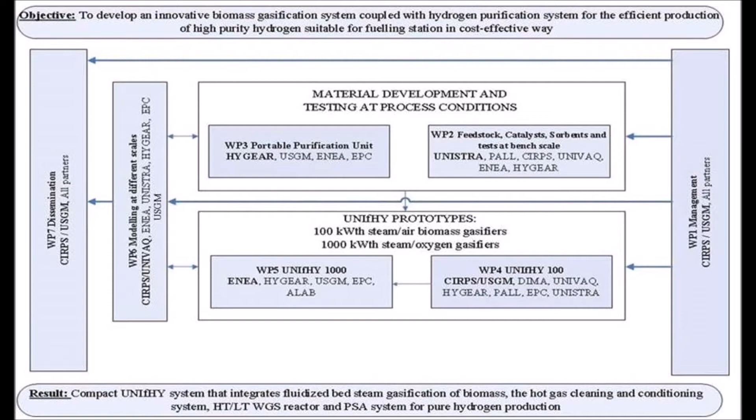UNIFHY develops a continuous, cost-competitive and sustainable process to produce pure hydrogen from biomass. UNIFHY integrates biomass gasification with catalytic hot gas cleaning, high and low temperature water gas shift performed within catalysts, and pressure swing adsorption for hydrogen separation,

and high thermal integration and efficiency by means of utilization of hydrogen-depleted syngas within the conversion process. During the entire project's lifetime, an effective and efficient management of the consortium was ensured by the former project coordinator, CIRPS Sapienza, and the replacing coordinator, Marconi University, to ensure adequate administrative support, monitoring the progress of activities and negotiating critical steps with all partners and FCH officers.

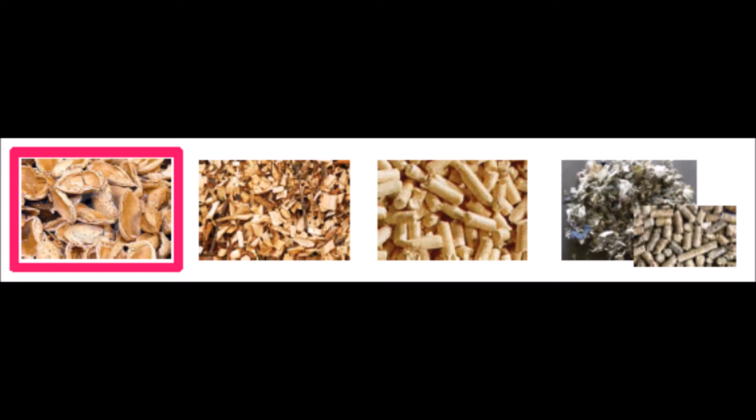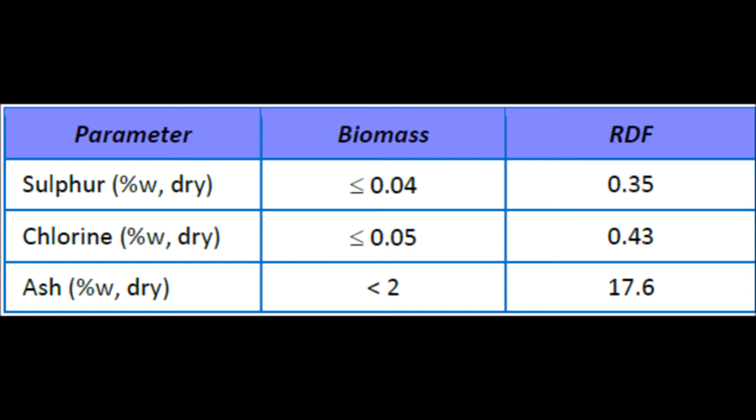A variety of biomass feedstocks have been characterized with respect to ultimate and proximate analysis, heating value and inorganic elements. On the basis of bulk density and cost of supply, almond shells appeared to be the most suitable biomass. In fact, it has an adequate bulk density, is relatively cheap, and has a content of sulfur and chlorine representative for many biomass feedstocks.

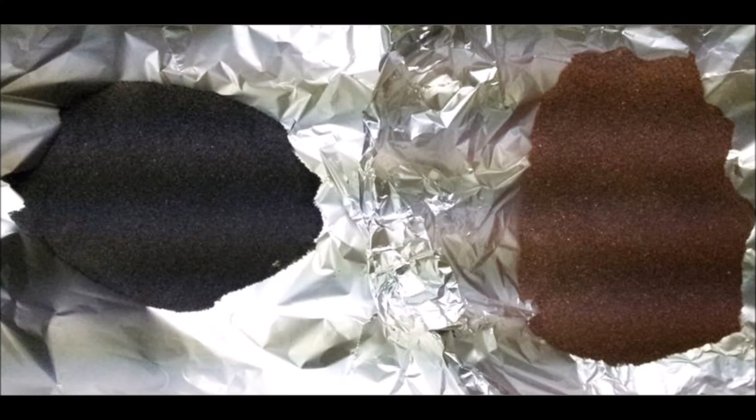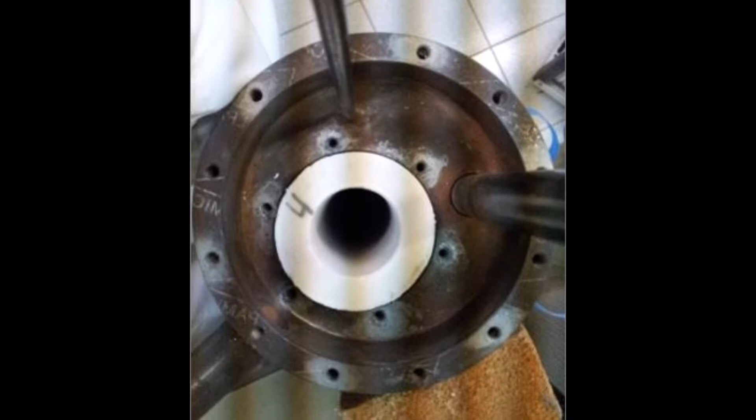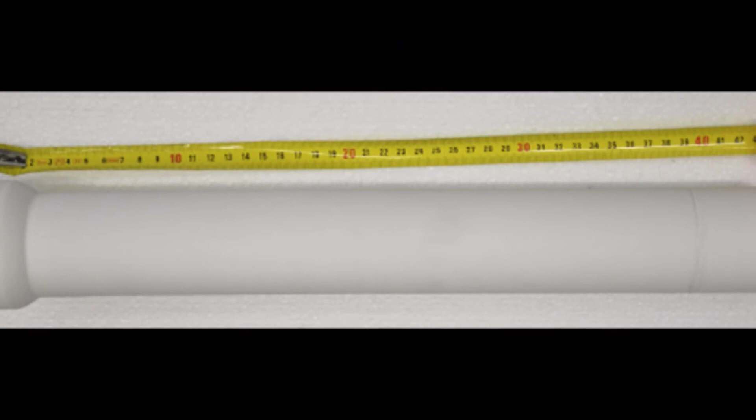Experimental gasification rigs with different capacity were used to test catalysts, sorbents, and filtration candles, so that standard characterization data such as sorption capacity and catalyst reactivity were compared with the behavior at real process conditions. The test campaign included 17 tests performed using 3 different types of filters hosted in the freeboard of the reactor vessel. The performance of a variety of catalytic filter candles when employed in a steam biomass gasification reactor freeboard has been assessed. The experimental campaign has clearly shown that the most interesting results are related to the use of catalytic filter integrated with catalytic foam.

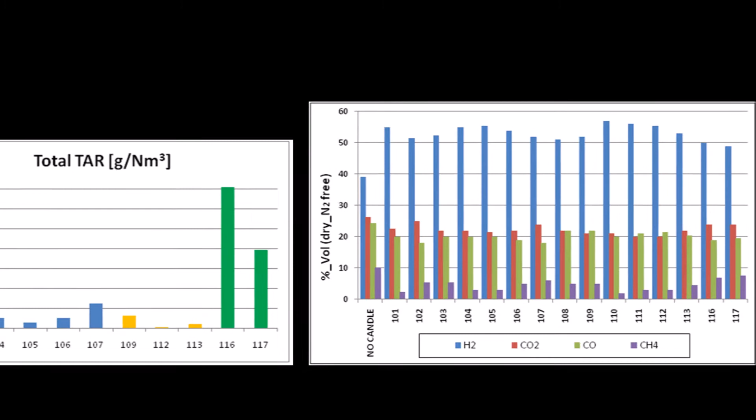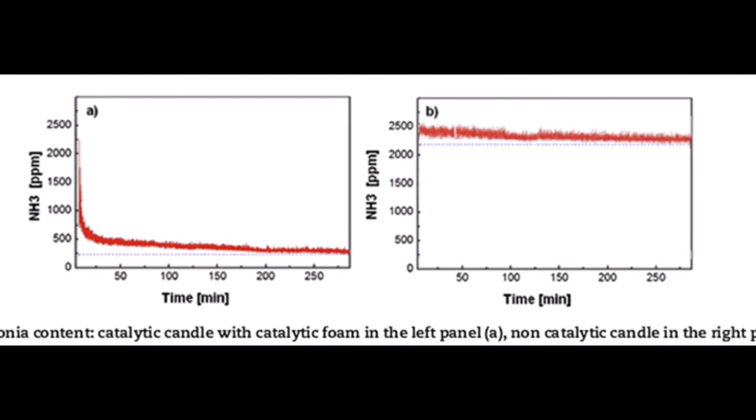In relation to other filters, higher percentage of hydrogen, smaller percentage of methane, higher water conversion, smaller content of ammonia and tar have been observed in syngas. On the other hand, the test stressed out the influence on the gasification process of the age of the olivine bed.

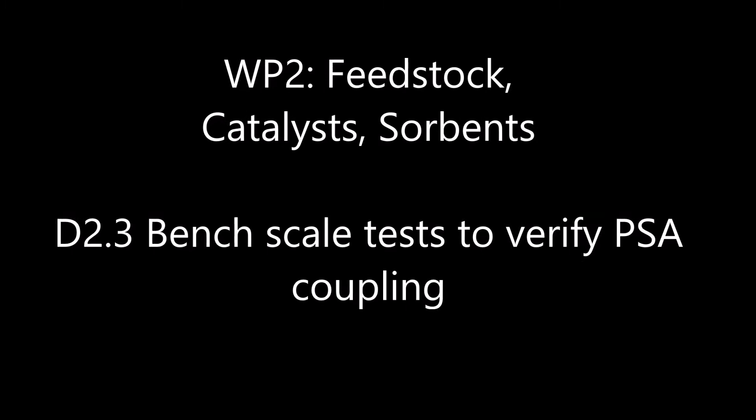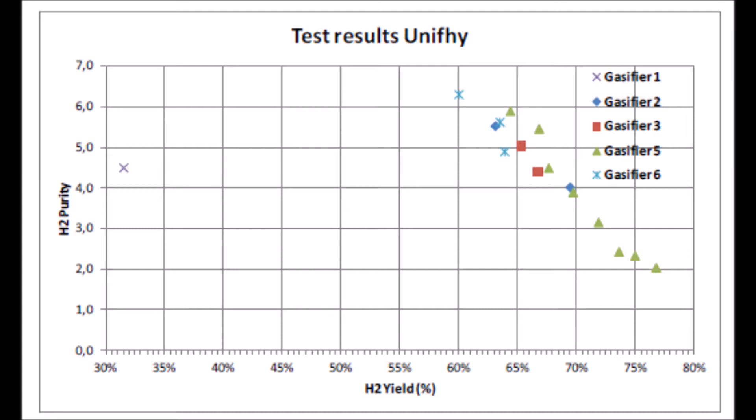Different wet gas compositions have been conditioned and upgraded to yield fuel cell grade hydrogen. Verification tests regarding the upgrading efficiency in terms of yield at a specified purity and the validation of HyGear's in-house PSA model has been assessed. Moreover, the PSA model was validated and agreed with the experiments and was used to define the design parameters for the PPS.

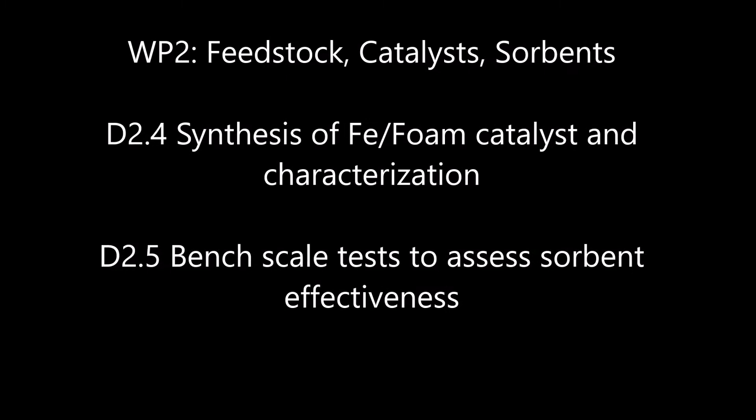An innovative catalytic system has been specifically developed for the water gas shift reaction to prevent pressure drop along the process and to increase the efficiency of the gas-solid contact. All catalysts were supported on ceramic foams.

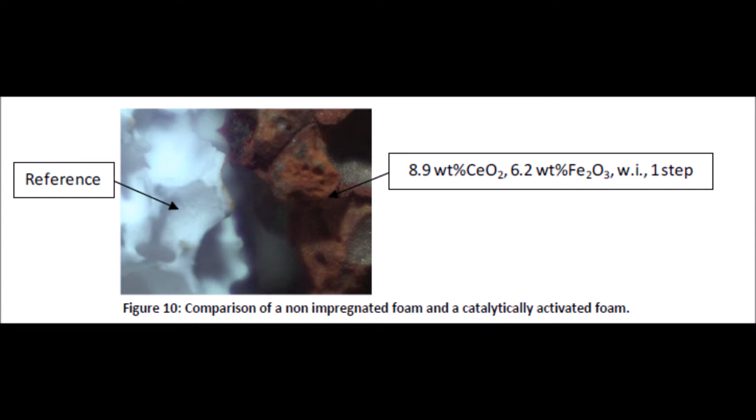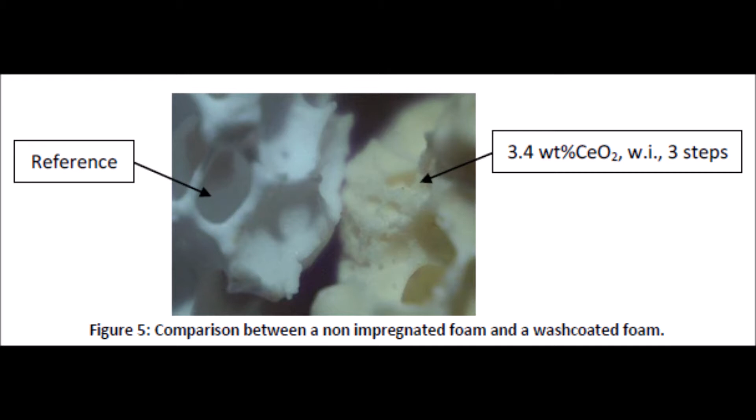The alumina foams with different porosities have been chosen to support materials for catalytic applications. About 150 ceramic alumina foams have been impregnated with cerium oxides to increase their specific surface area, and with iron and copper catalysts to test the water gas shift performance.

Reactivity tests have been assessed. Best results were observed with H2O per CO ratio of 2, temperature of 450 to 550 degrees centigrade, residence time of 1 to 1.5, to allow the water gas shift reaction, remove possible coke, and avoid reduction of the catalyst.

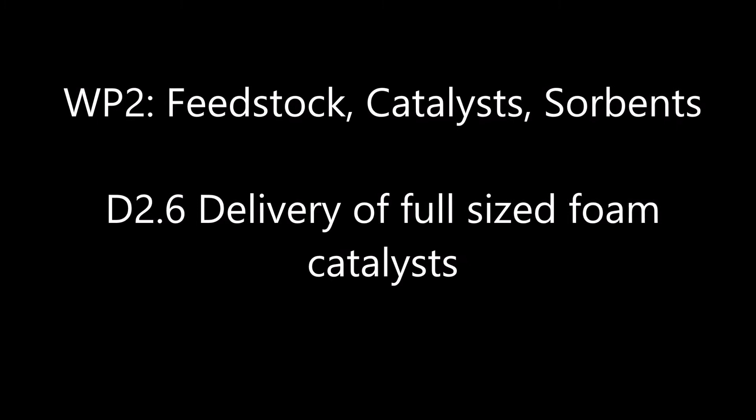Strasbourg University has developed specific innovative catalytic systems for high and low temperature water gas shift reaction. These catalysts consist of iron or copper supported on ceramic foams, to be used at 450 or 250 degrees centigrade respectively after the gasification reactor, to increase hydrogen production.

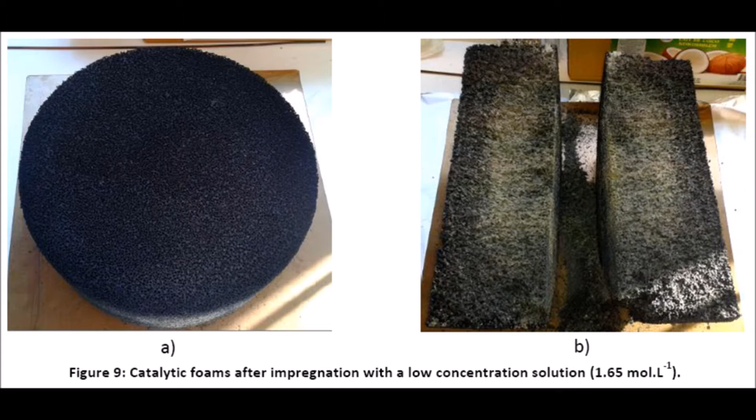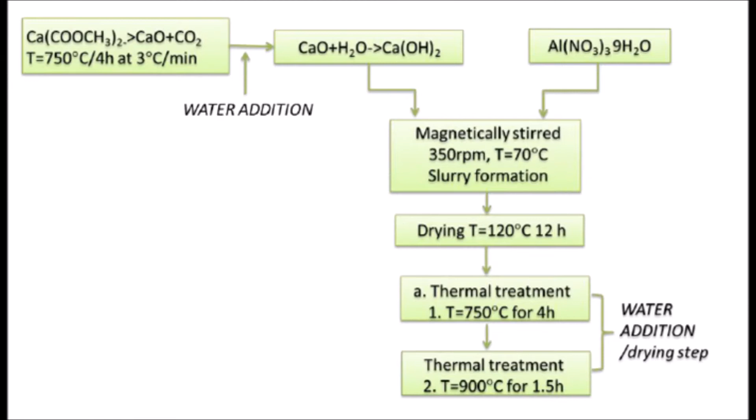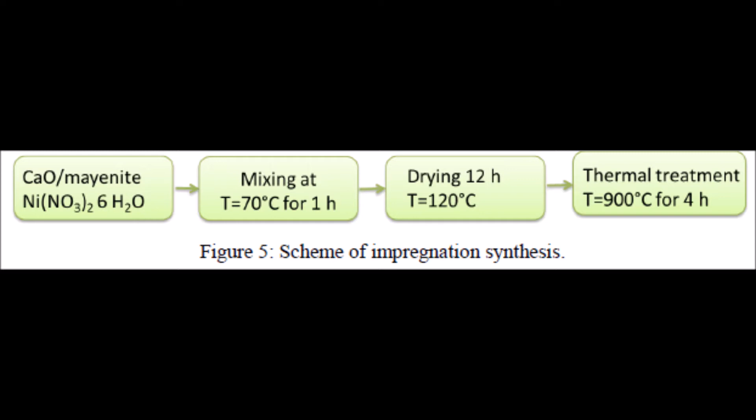This deliverable aimed to study calcium-based CO2 sorbents and bifunctional materials using different synthesis methods: hydrothermal, co-precipitation, and wet mixing. The most important features of the materials, like their structure, morphology, and textural properties, were analyzed by different characterization methods by means of specific surface area and pore distribution volume, microscopy, and X-ray diffraction analysis.

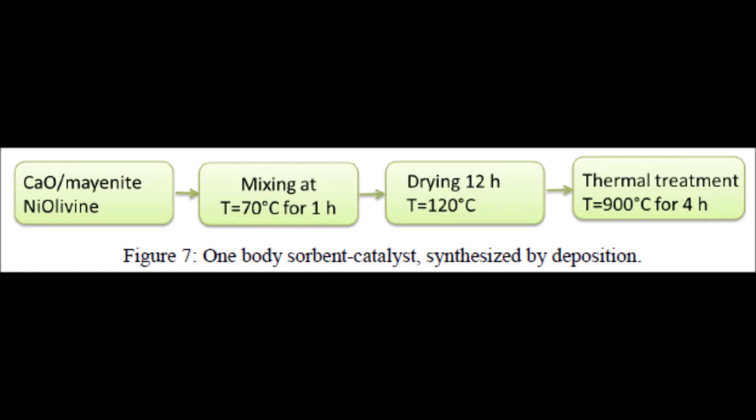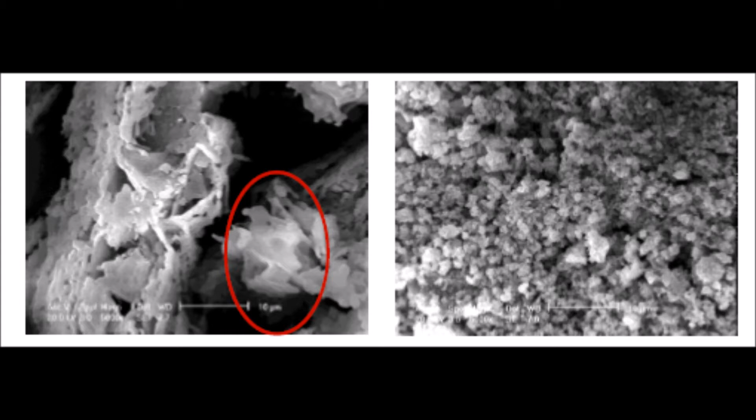In particular, mayenite, a ceramic stabilizing support for high-temperature sorbents, is not only an efficient binder, but also showed catalytic properties in hydrocarbon reforming and cracking. CO2 sorption tests have been assessed on the material realized in the previous phase in order to identify the sorbent with the best CO2 capture performance.

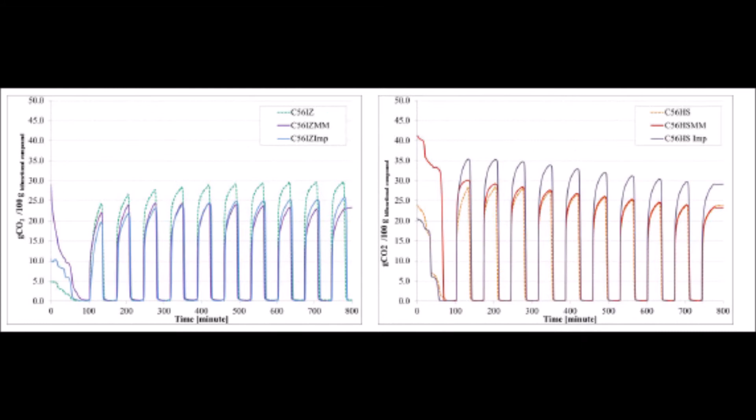Also, tar steam reforming was treated. Solid bifunctional sorbent catalysts were developed to perform catalytic steam reforming of tar at the outlet of the gasifier and simultaneously remove CO2, increasing hydrogen production.

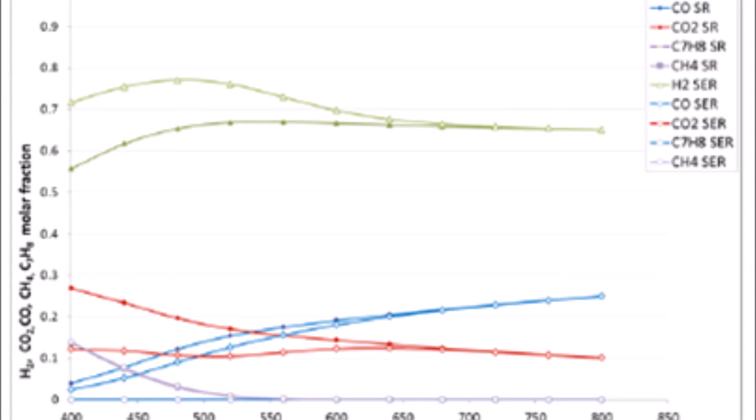The third work package focused on the design and development of the PSA and water gas shift unit. It also provided the engineering and construction of the portable purification system, which includes PSA, water gas shift, and complementary components.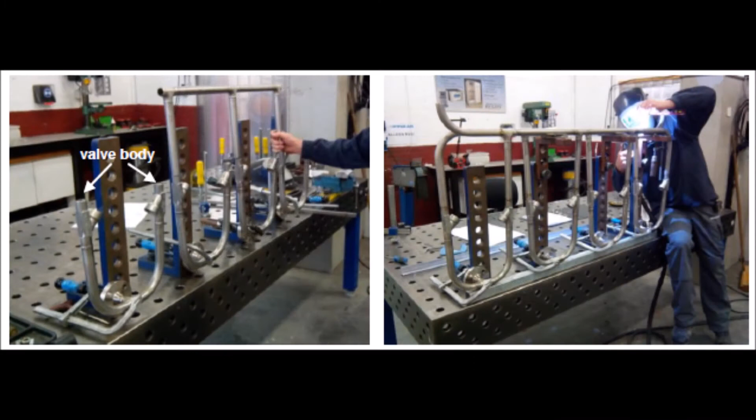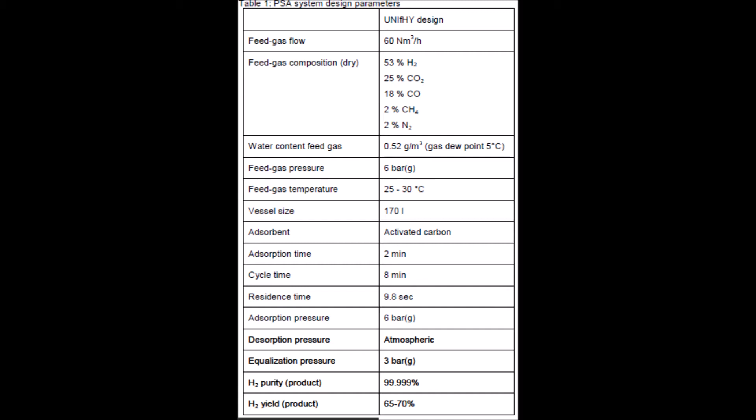Based on results reported in deliverable 2.3, HyGear's in-house PSA model was validated and found to agree with the experiments. The next step in development of the PSA was to use the model to define the system design parameters for the PPS unit.

This deliverable relates to the design and construction of the LT water gas shift reactor implementing catalytic copper-coated ceramic foams. Reactor dimensions were defined based on lab-scale testing performed by Strasbourg University and pressure drop evaluation performed by Pall.

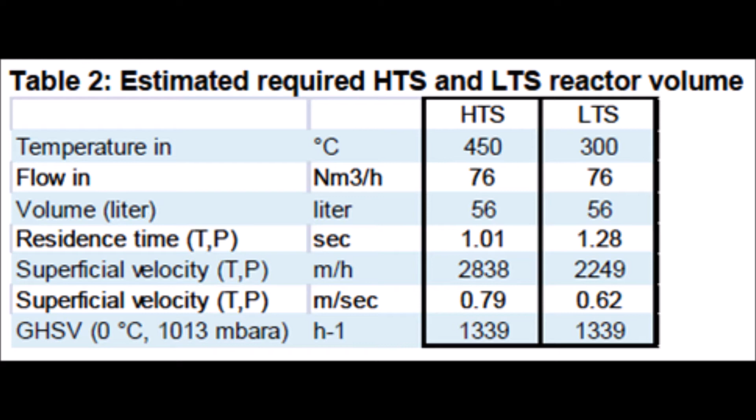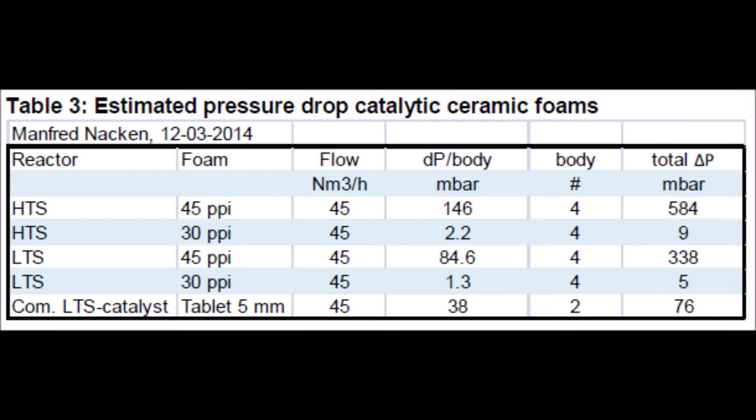The Transportable Purification Unit, or PPS, consisting of the integrated water gas shift reactor, compressor, and gas upgrading unit, has been set up to advance low hydrogen-containing syngas.

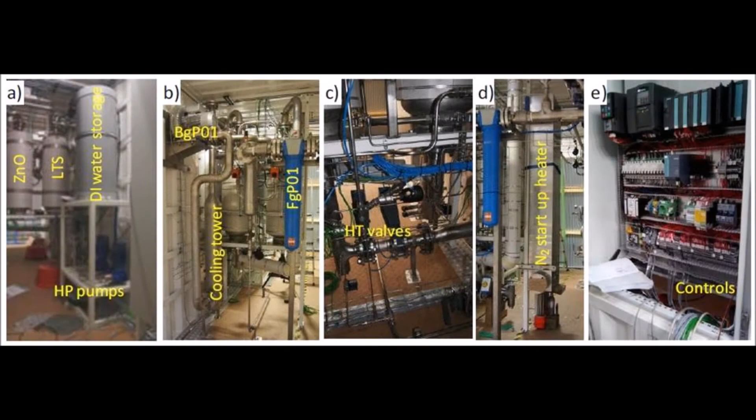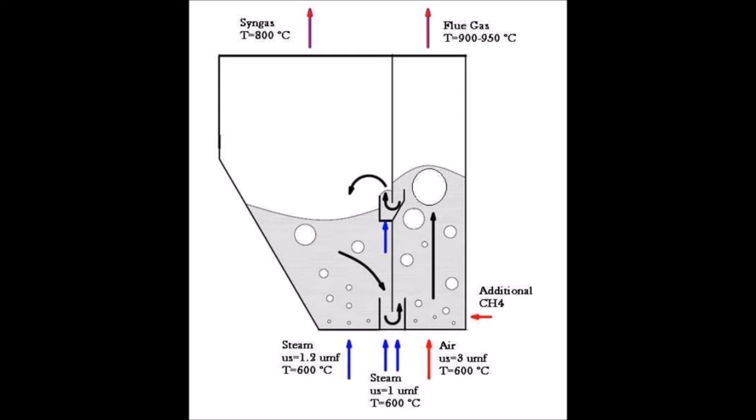Work Package 4, dealing with the use of different feedstock and optimized catalytic filter candles in the UNIFHY 100 kW thermal gasifier, tested the feasibility of the process at pilot scale. These tests assess the feasibility of UNIFHY using a double fluidized bed steam and air gasification technology.

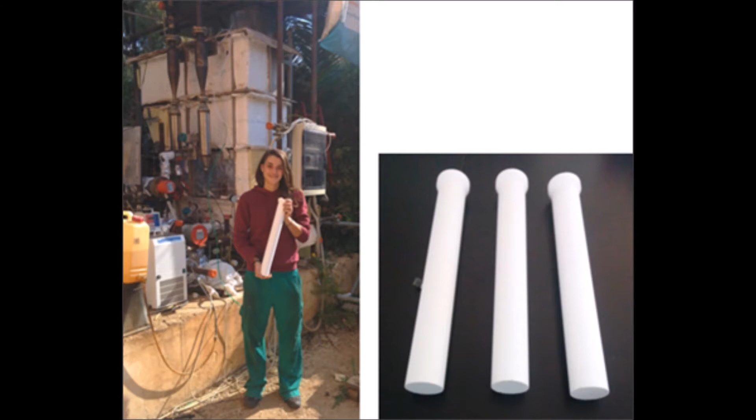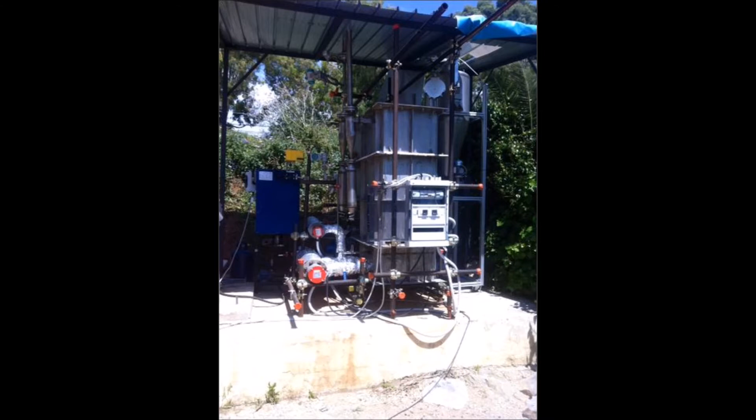New ceramic filter candles for high-temperature applications, selected within Work Package 2, have been tested under reducing gasifier conditions in the UNIFHY 100 kW thermal gasifier at CIRPS in Civitavecchia. Tests carried out show the UNIFHY 100 gasifier installation in Civitavecchia has been developed up to the operational stage.

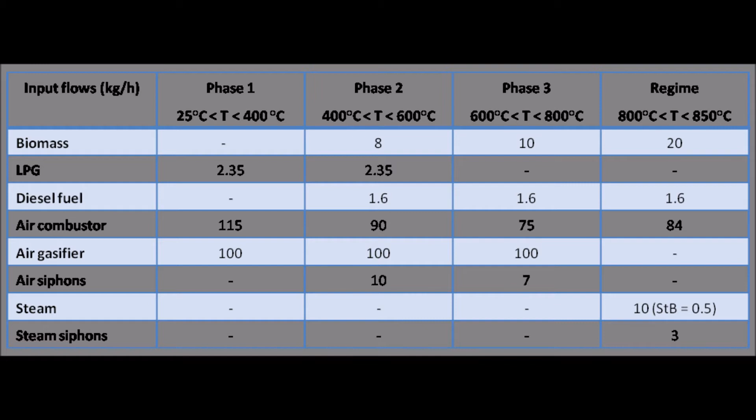Tests with only steam and with steam plus air were carried out with the 100 kW thermal prototype. The syngas composition from the steam tests still contained a percentage of nitrogen. Furthermore, the tar content was still too high, and this caused difficulty reaching and maintaining the operating temperature during the tests.

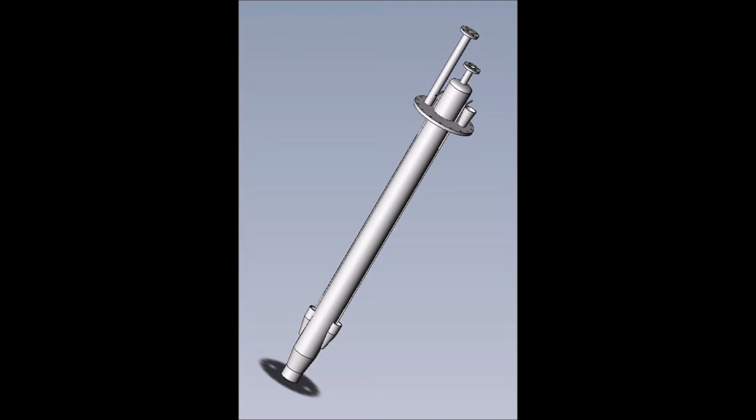The structural changes apparently were not enough to solve the major issues of the gasification system, so a new reactor design was elaborated, characterized by new geometry and features.

Further tests of overall duration of 15 hours were carried out with the 100 kW thermal pilot plant gasifier operated with air and steam in dual fluidized bed mode. Tests were carried out at 770 degrees centigrade using a steam to biomass ratio equal to 0.5. The biomass used during the test was almond shell.

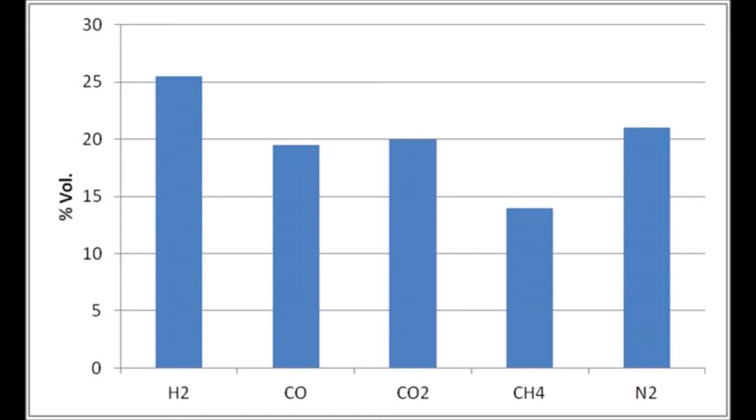The composition, or concentration, in terms of hydrogen, CO, CO2, CH4, and tar was analyzed with different devices.

The issues already stressed in deliverable 4.2 led to a new design of the gasifier. A double fluidized bed was realized in scale in order to generate a cold model in which the fluidization conditions and the recirculation of material could be verified and improved.

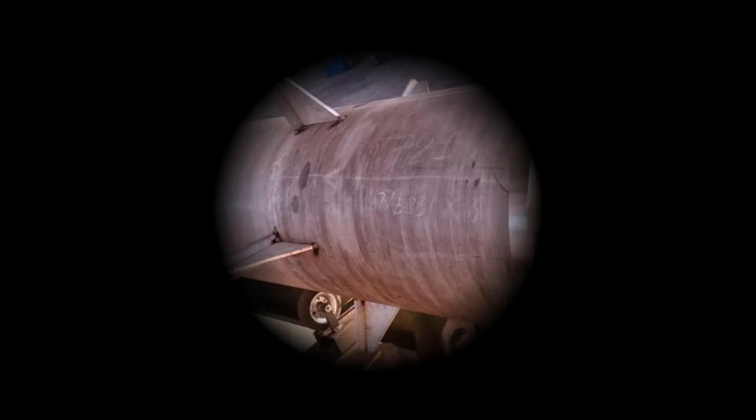In order to verify the circulation in the cold model, some tests were carried out using PTV analysis. A CCD camera with high velocity and resolution was used for this scope. It was possible to evaluate the average velocity of the outgoing particles over time and to calculate the solid circulation flow rate in the gasifier, with results higher than required.

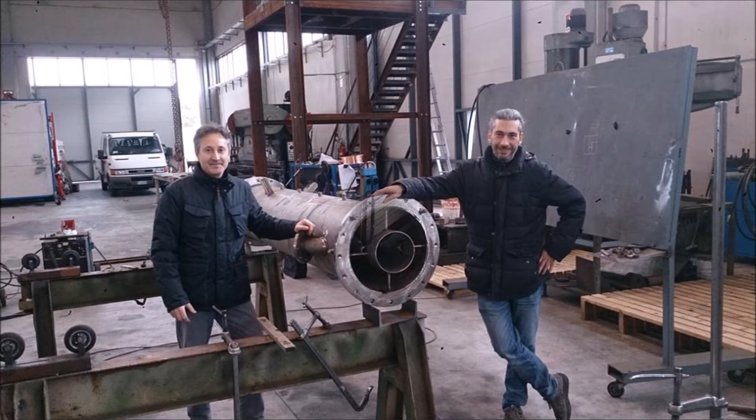Once the new configuration was verified, the realization and assembly of the real gasifier could start.

During Work Package 5, the portable purification station has been integrated into a side stream of a 1000 kW thermal gasifier to demonstrate the operation of the system at industrial gasification scale.

In deliverable 5.1, an experimental test campaign with the gasifier in its original configuration was performed in order to collect data on the performance of the 1000 kW thermal pilot plant in the basic configuration, with internally circulating bubbling fluidized bed.

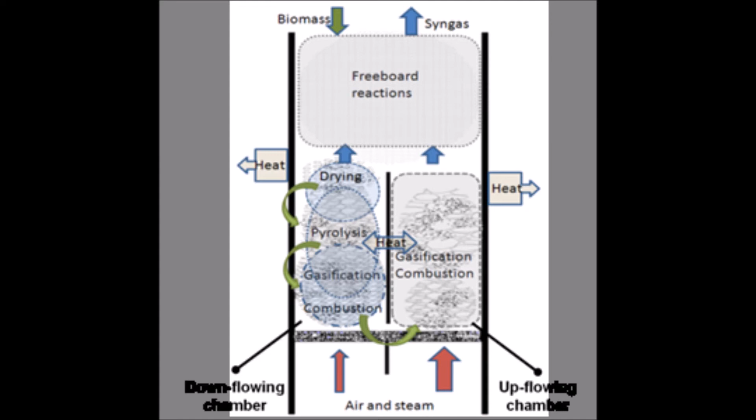The tests were carried out in order to acquire reference data to be used in comparison with the gasifier in the advanced configuration.

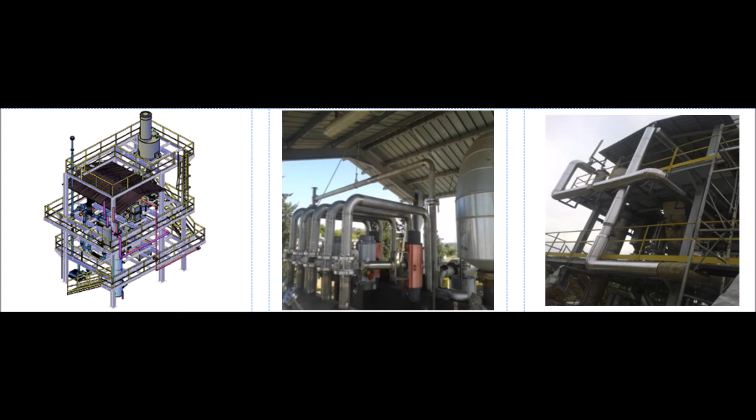An important goal of this activity was the identification of the process conditions at which the ceramic filter system has to operate to guarantee proper particle filtration and reforming of tar and light hydrocarbons.

These experimental activities were intended to check the efficiency of solid particle filtration and the effectiveness of gas cleaning in the upgraded gasifier version, with 60 ceramic filter candles inserted in the freeboard, over several hours of operation.

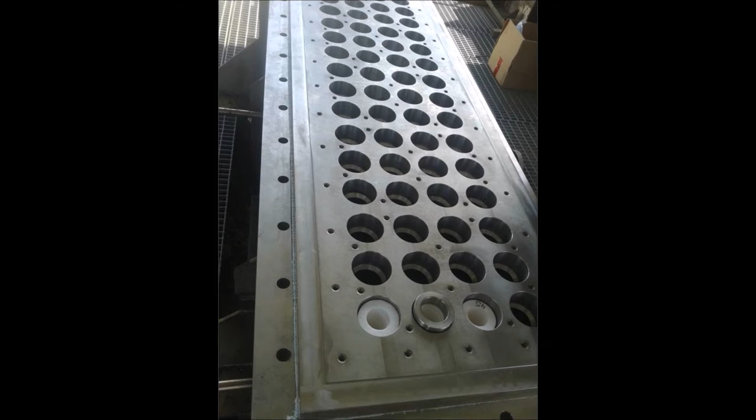A first test campaign was carried out using non-catalytic filter candles for evaluation of optimal parameters and the effectiveness of the filtration system.

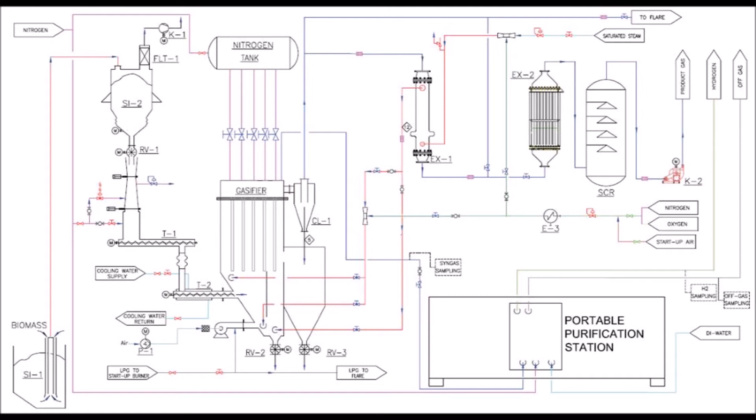The second test campaign was instead performed with a catalytic filter system. In view of the experimental campaign with the gasifier coupled to the portable purification system, two new piping lines at high temperature were realized. The coupling of PPS with the gasification plant was jointly defined by HyGear and ENEA. The coupling of gasifier with PPS was successful.

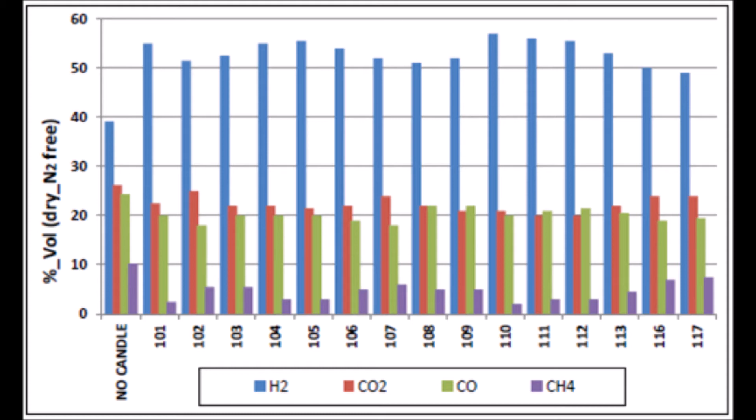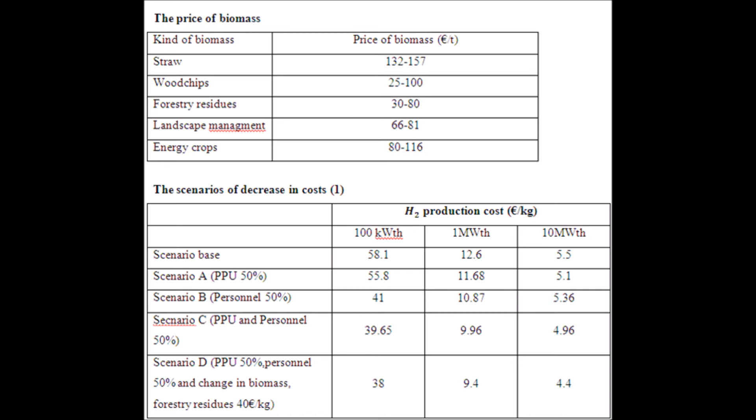Also, a techno-economic analysis of the two UNIfHY prototypes was performed. It involved the assessment of the technical performance at the component and global level of the systems. Results also showed that the cost of personnel and PPU are the largest in the two considered configurations.

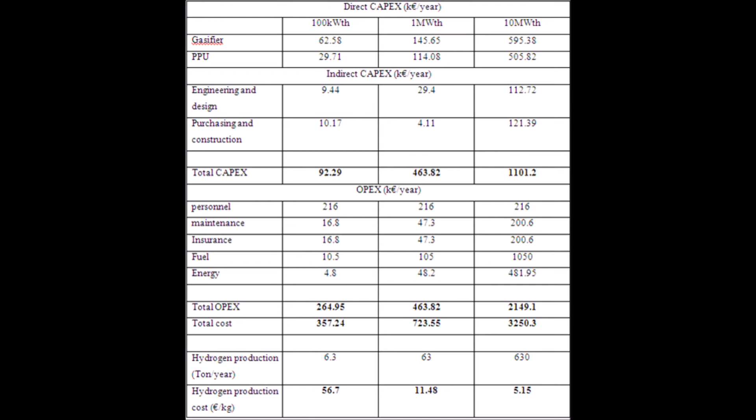Also, a sensitivity analysis was carried out on the indirectly heated configuration, varying the steam to biomass ratio and size of the plant at the best operating temperature.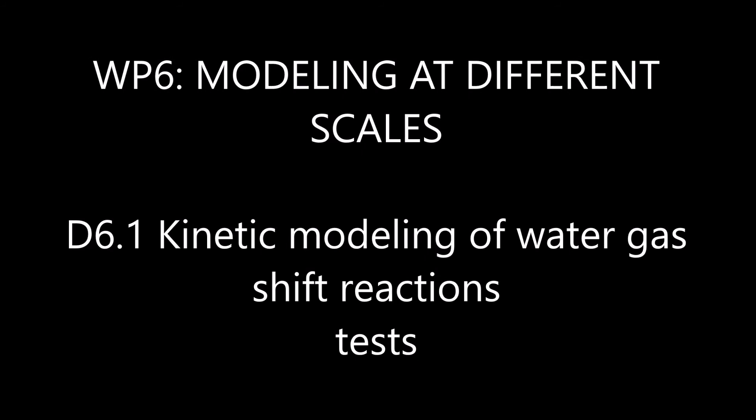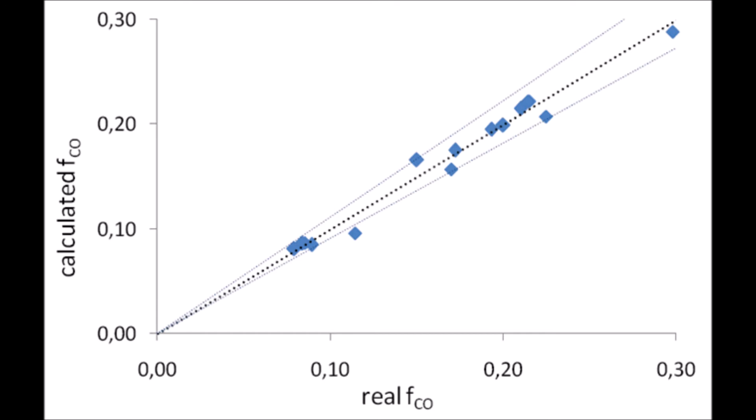The objective of this task was kinetic study of the complex heterogeneous reactions taking place during the water-gas shift reaction in presence of catalytic ferrous and copper foams. The main aim was to propose a kinetic model of the reactions in the higher and lower temperature water-gas shift reactors and determine the kinetic parameters in presence of these developed catalysts.

This study has permitted to establish two power law rates for the high and low temperature water-gas shift reactions.

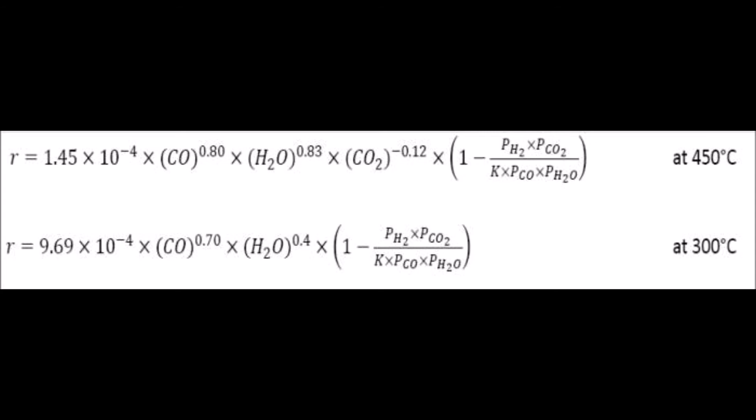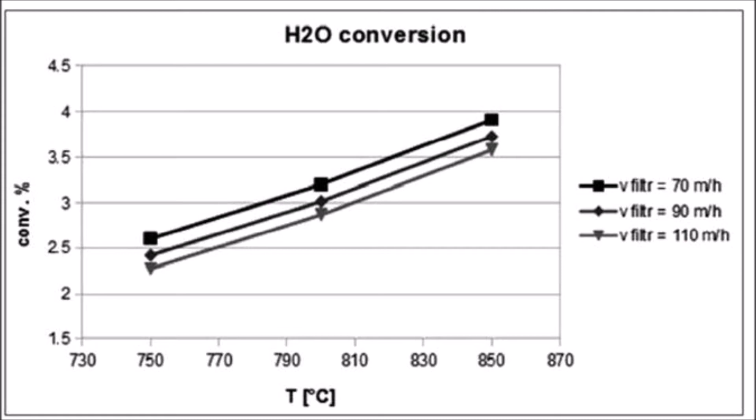A CFD model was developed to allow simulation of the catalytic filter candles integrated in the reactor freeboard. The activity of the filters has been analyzed by studying the trends of temperature, gas velocity, tar, and methane conversion through the filter candles. The kinetics of the chemical reactions inserted in the model were taken from literature. The model was validated by comparing the simulation outputs with experimental results of tests on a bench-scale gasifier containing a ceramic catalytic filter.

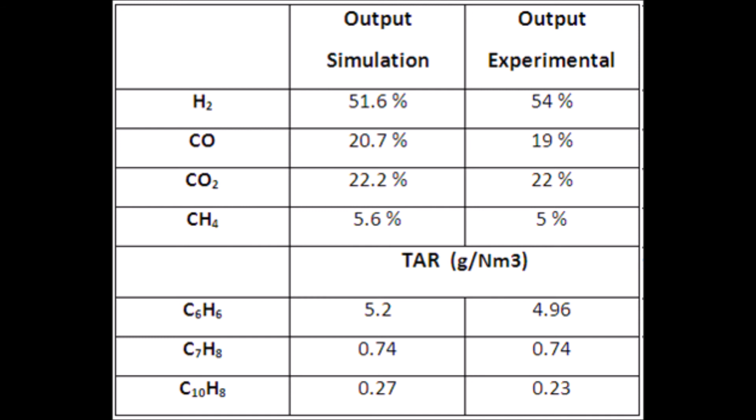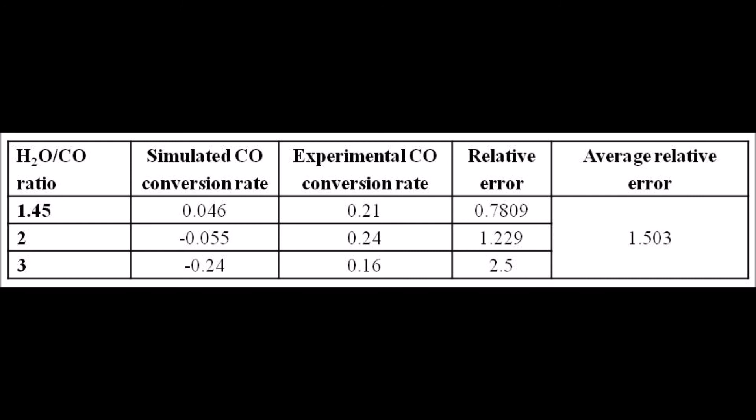The entire UNIFHY system has been simulated on the basis of experimental results within the project. Models of the dual fluidized bed steam gasifier, catalytic filter candles, zinc oxide guard bed, low-temperature water-gas shift reactor, and PSA have been developed. Different values of steam to biomass ratio, water-gas shift residence time, and operating temperature have been considered.

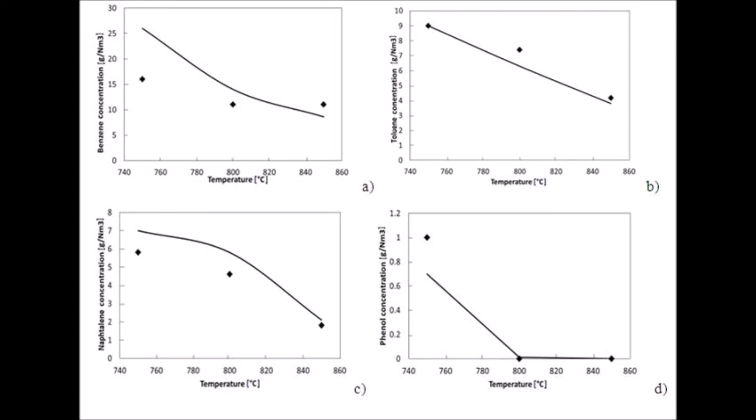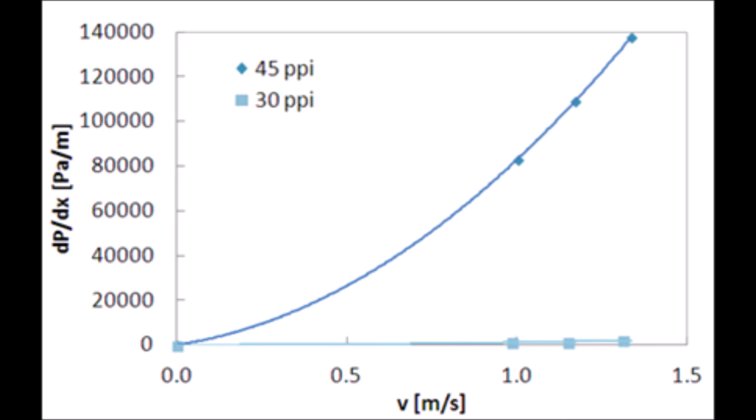The comparison between the simulated and experimental data showed that the model predicts gas composition and product yields with very good accuracy. Global simulations were carried out for the two different configurations: dual fluidized bed, and steam and oxygen fluidized bed gasifier. Furthermore, a sensitivity analysis for the dual fluidized bed system was carried out, varying different parameters. Also, an evaluation of electrical consumptions in order to determine which are the best configuration and conditions, even from an energetic point of view, was carried out.

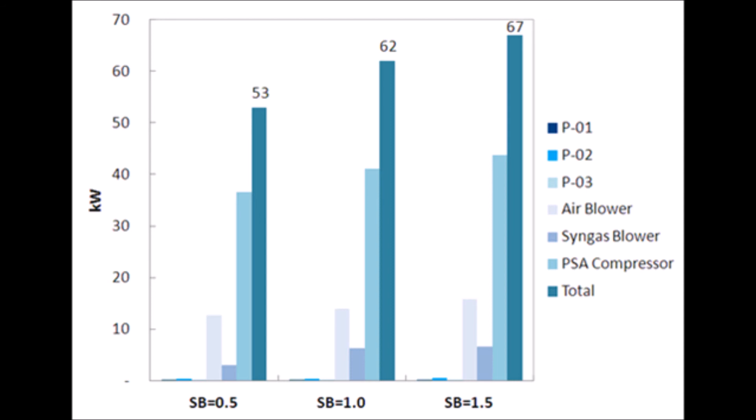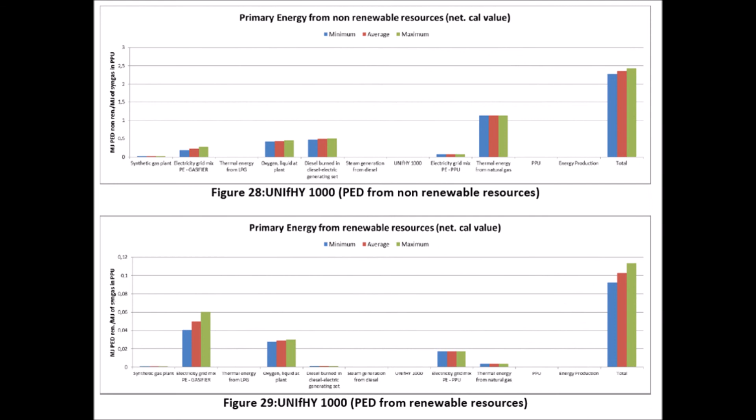The life cycle assessment has been developed for the UNIFHY model 1000 kW thermal, as well as for the 100 kW thermal. The UNIFHY models have been defined in Gabi software by using data collected from the project partners, life cycle assessment databases, and data from literature.

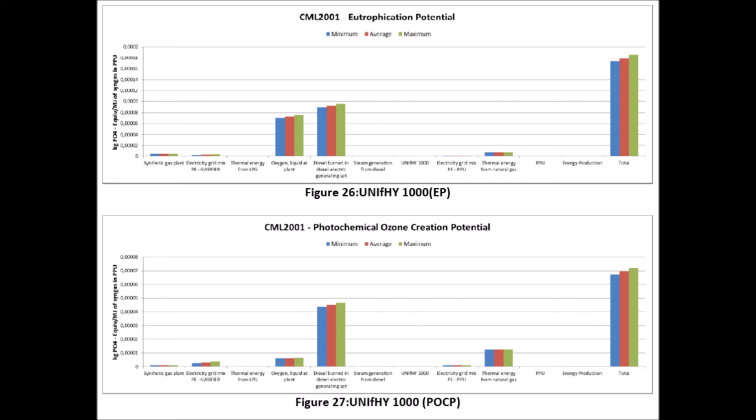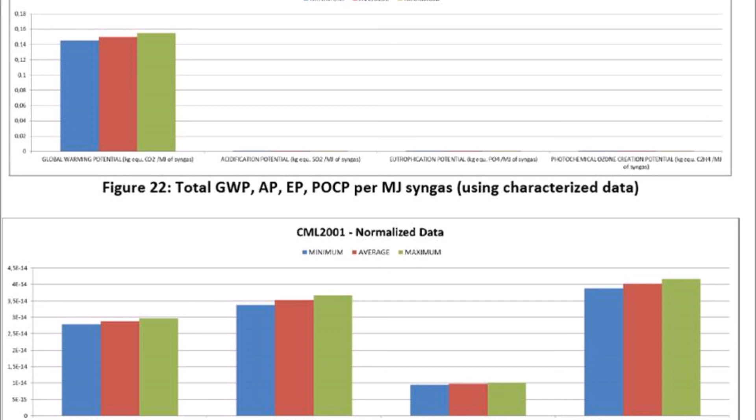Impact categories considered have been defined according to the fuel cell hydrogen guide as listed below: global warming potential, acidification potential, eutrophication potential, and photochemical ozone creation potential.

All partners were actively involved in dissemination and exploitation activities. UNIFHY objectives and results were advertised through the creation of a dedicated website, the publication of around 30 articles, participation in international conferences, and the production of newsletters.

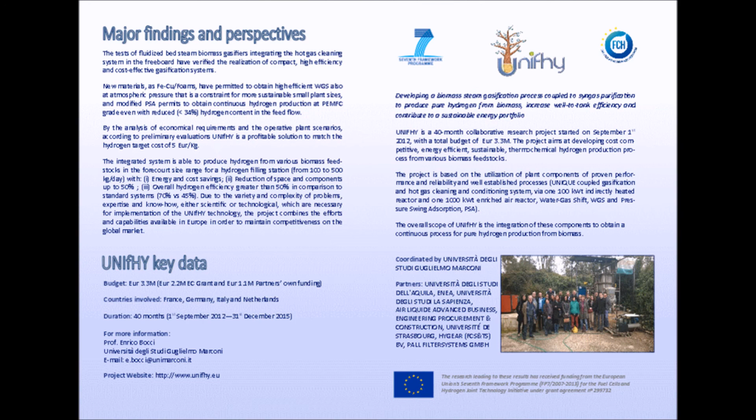The transfer of knowledge and technology among research institutions and industrial companies was carried out through a detailed exploitation business report focused on the social and economic potentialities of the green hydrogen market. The partners are also involved in patent submission in order to protect the most innovative results.

Commercial promotion was carried out by participating in international fairs and addressing commercial presentations to key customers and institutions. Media campaigns were developed for a general purpose target and also within a variety of business sectors.